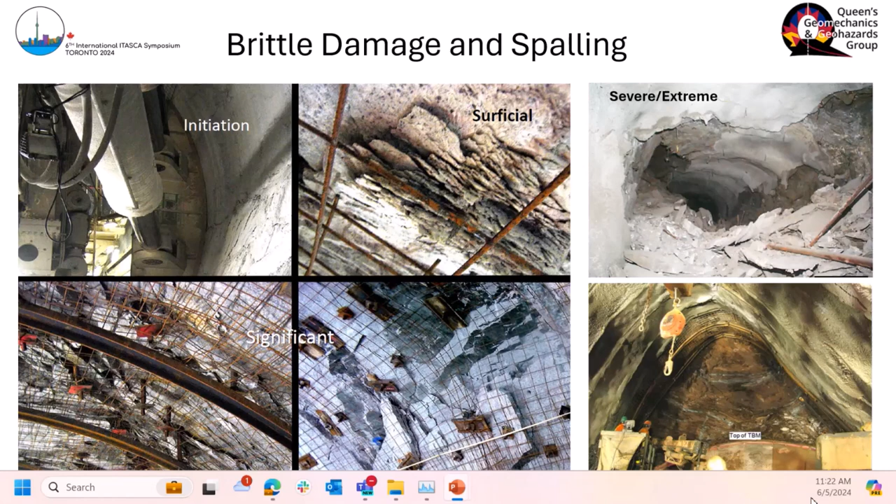But it fundamentally starts with some sort of a way of generating an extension crack in compression. The classical model for this, way back to Griffith, was the shear flaw, which could move in compression, generating singularities and creating a crack. And we make that big leap from that model to what we see as visible macroscopic excavation scale spalling. And how do we get there?

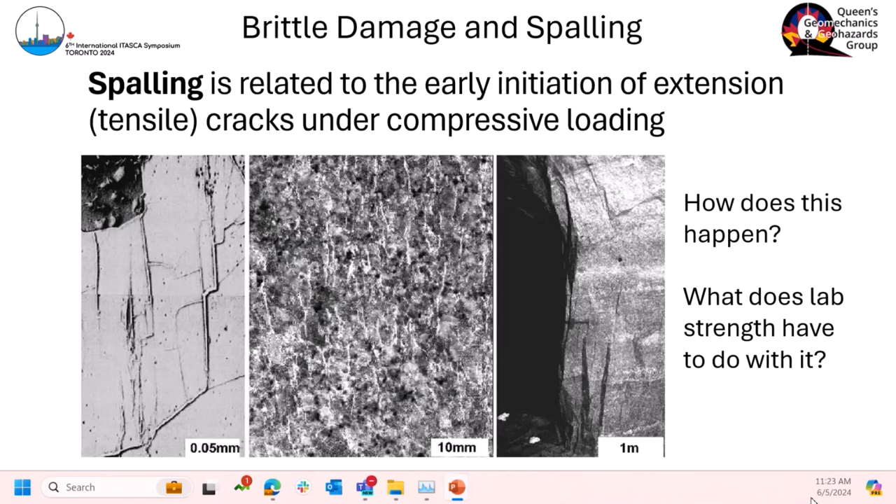Fast forward, we have all sorts of ways of creating what we might call brittle damage models, either with continuum models, simply playing around with the plasticity parameters to fake brittle fracture, or we can go to something more like UDEC, a discrete element model, to create brittle damage propagating through.

You can see that the key here is that the yellow in that model, the middle figure, is actually extension or tension, and only when you get farther out into the confined rock mass do you induce shear. Then we have complex models to look at interactions between structures, bedding, and brittle fractures in all sorts of different rock types. These all look great, and they all seem to simulate something.

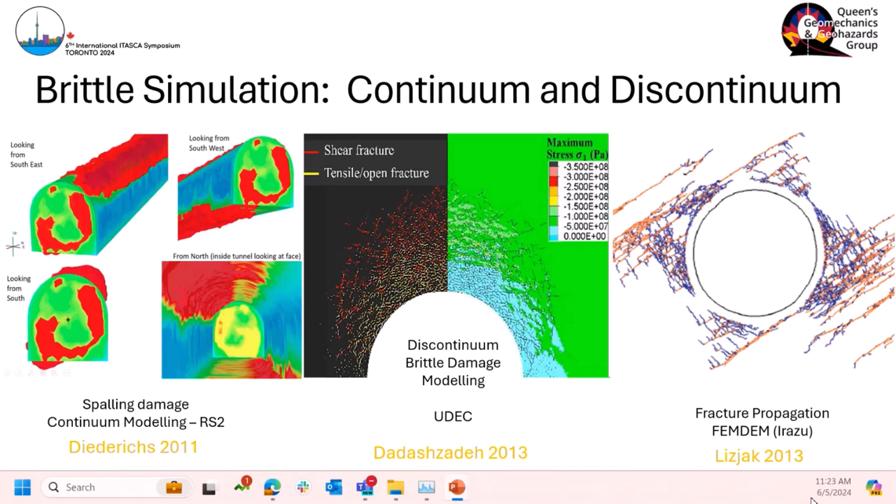But now we're into this wonderful... how do we get rid of that? Well, that's going to be a problem. How do we get rid of that thing on the bottom?

Oh, well, okay. So now we're into this world of colorful modeling, and the big question is: is it real?

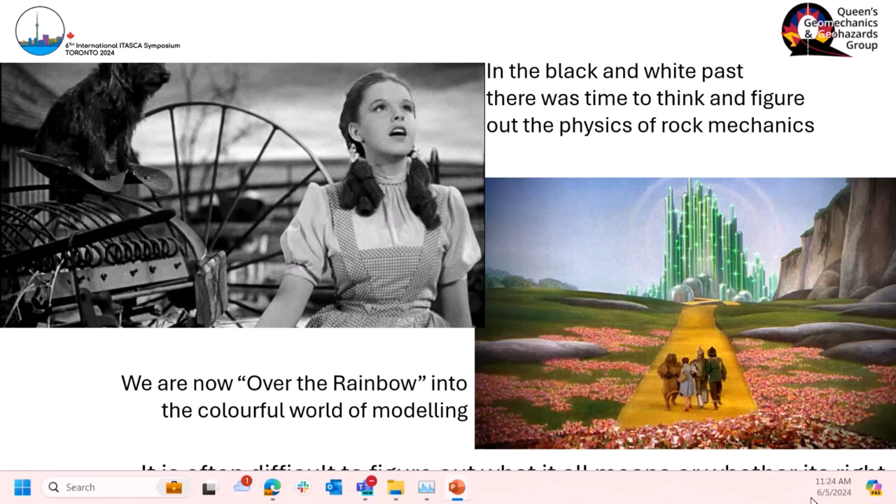So if we go right back to the beginning, Griffith was actually an aircraft engineer trying to figure out why windshields cracked on aircraft, and he came up with the idea of the inherent flaw, both in tension. It was extended into compression.

The idea is that this flaw in tension starts to pull apart. You get singularities at the ends, and they propagate. The longer the crack, the bigger the singularity, the more the crack grows. So this tension crack would extend. If you think about it in compression, you have to drive some sort of shear mechanism to create those singularities, but the physics is very similar.

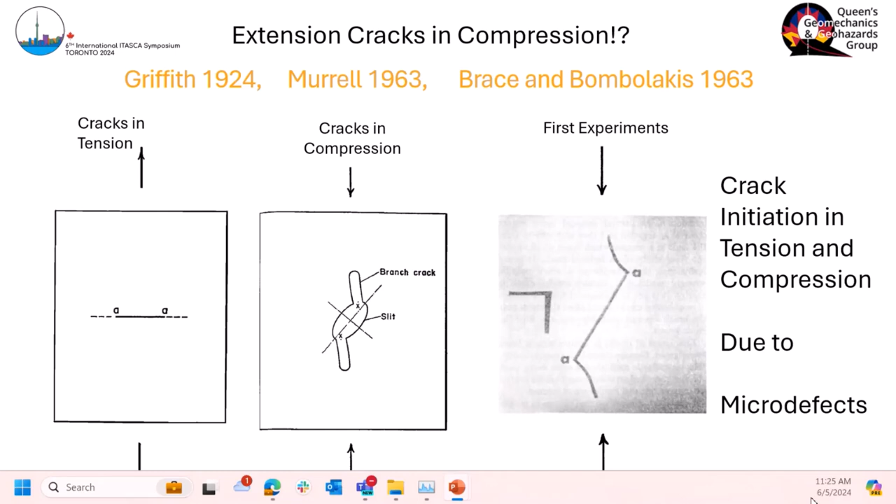So in tension, that's going to be very annoying. I don't know if there's any... oh, there we go. Okay, got it.

So in tension, I often used to say first crack wins. It's actually quite easy to figure out when damage begins and ends in a tensile situation, because of this idea that the longer the crack, the less stable it is. It's an unstable crack. As soon as you induce the first crack, the system will break.

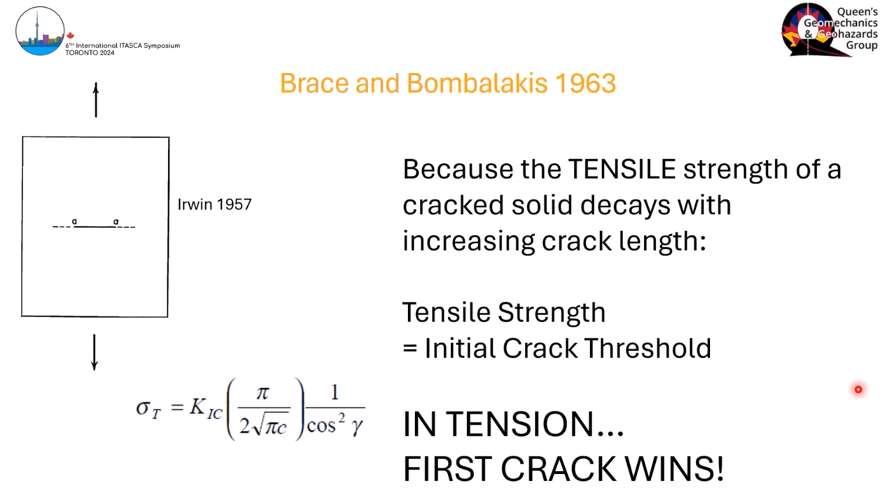Now, following on from that, this shear model was also good in compression to predict when things start. But if you do the math on any of these models, you find that the cracks stop very quickly as soon as they enter because the world is in compression, sigma 3. You have extension deformation, but the world is still under confinement, and as soon as these cracks go off on their own, they stop pretty quickly. So that's a problem.

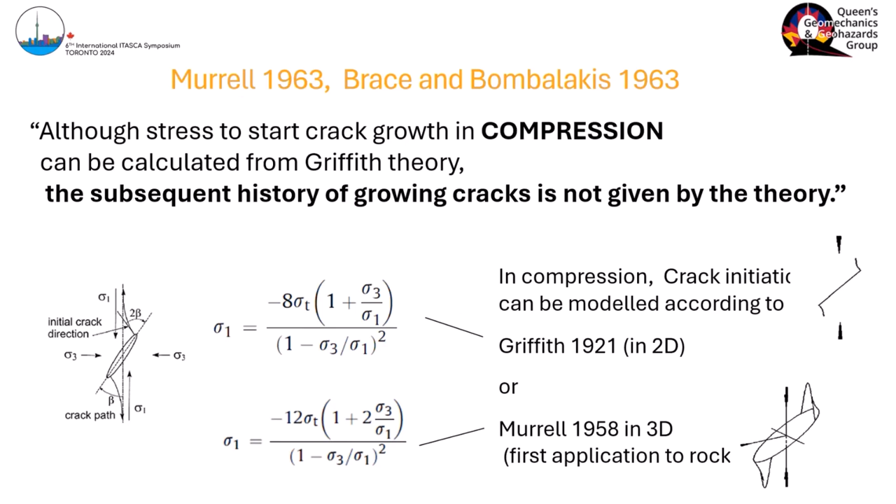What's wrong with this model? Things got even harder when we attached friction to these cracks. The original Griffith crack was open, but of course, cracks are closed.

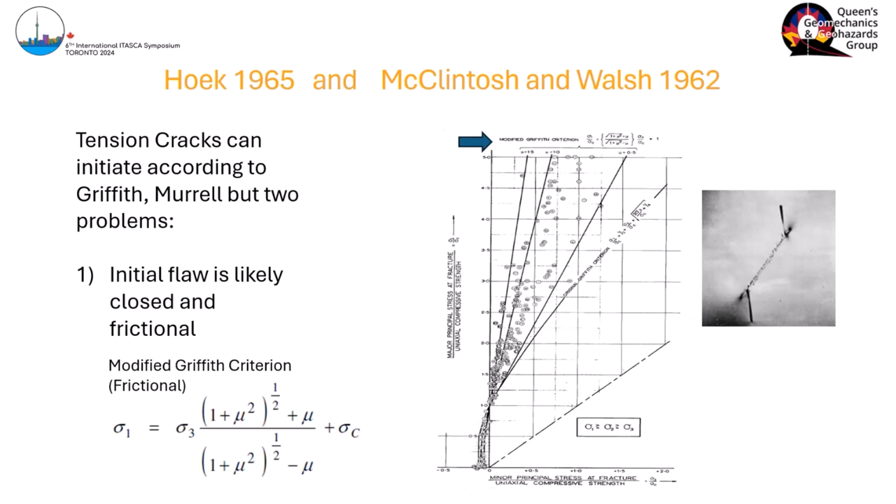So if you introduce friction, things get even harder to break and propagate. And it quickly becomes apparent that the only way you can propagate fractures through a confined medium is if these cracks interact. So this whole simple idea of fracture mechanics starts to get very complicated. The first crack is only the beginning in this case.

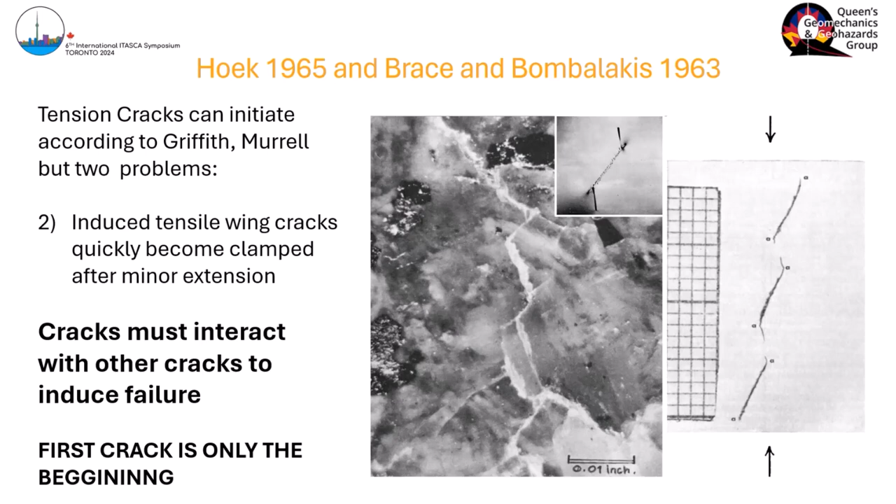But there was some hints of progress. Brace, Paulding, and Scholtz published some great data back in '66, which showed that the onset of lateral dilation in moderately slow loading happened at about half of the UCS, a little less than half the UCS. That's very familiar to most of us now. It had a slope in confining stress, axial stress space, sigma 3, sigma 1, whatever you like, which was non-zero.

But it's hard to imagine that this was actually frictional. Perhaps it is, but you can see that looks very much like if we do lab tests today of any kind, we get the same relationship for the first onset of dilation. But as we know, in the test it keeps going up to peak. Those cracks can't really fully damage the sample. We can record them through AE, and we can record them through strain measurements.

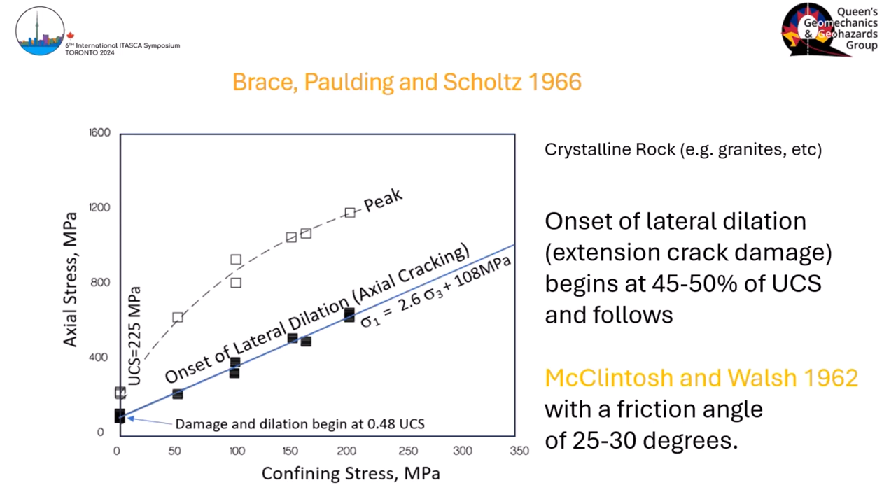Evert Hoek and others, I'm sure, did some experiments to show that in fact this idea of crack propagation, which is key to these cracks going anywhere once they start, is extremely sensitive to confining stress. So sensitive, in fact, most models don't really have enough detail and gradients in this regime to help us. But you get the idea.

As sigma 3 over sigma 1 drops, or sigma 1 over sigma 3 increases, down to, in this case, sigma 1 over sigma 3 around the 10 to 20 mark, only then do you get cracks propagating any distance beyond their initial dimensions. And that's really critical to how fractures work.

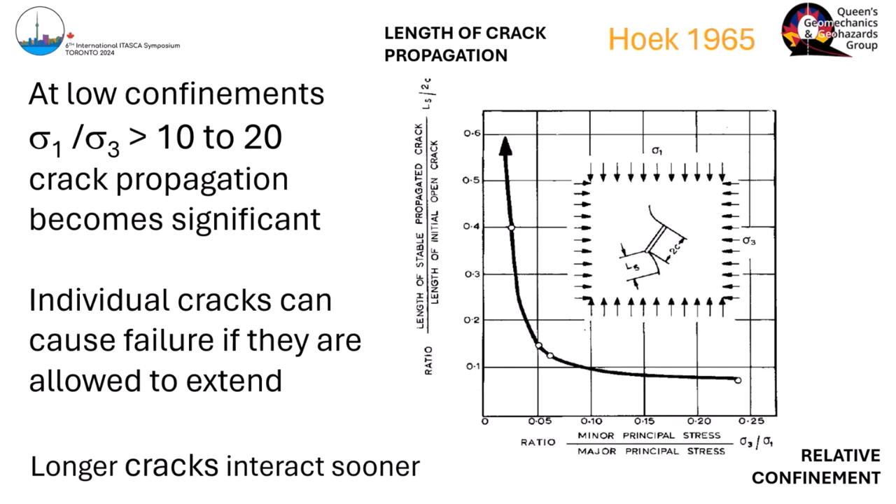This is not the same confinement dependency that was developed by Mogi through lots and lots of triaxial testing. Mogi's line is actually also important. It was an empirical line based on how tests behaved, but if you run it through with reasonable values of Poisson's ratio, you realize that this line marks something important.

Extension fractures can occur on the left side of that line and above it. There's no extension strain on the right side, just from elastic theory. And if you have no extension strain at all, everything's moving inwards, you can't create extension cracks, period, even small ones.

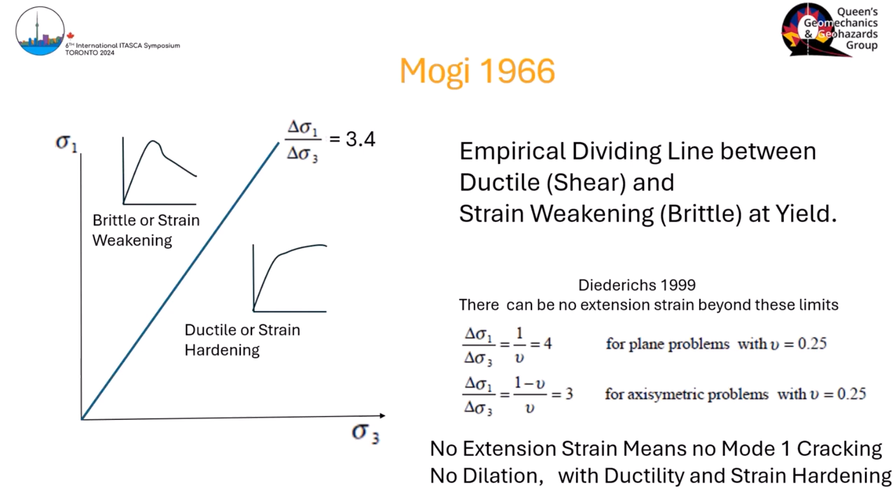And so this is the dividing line between truly ductile, or strain hardening, or shearing behavior, and brittle behavior. So you have these two thresholds, and you can see them here. The Mogi line, if you will, with sigma 1 over sigma 3 less than 5. And this Hoek line, when you start to drop below 10 to 20, in one case, above that 5 line, you have purely shear behavior.

This is the stuff that soil mechanics is based on. And without these three gentlemen I just mentioned, by the way, we'd be still pretending that rock is soil and just making the numbers bigger. But that's the soil behavior.

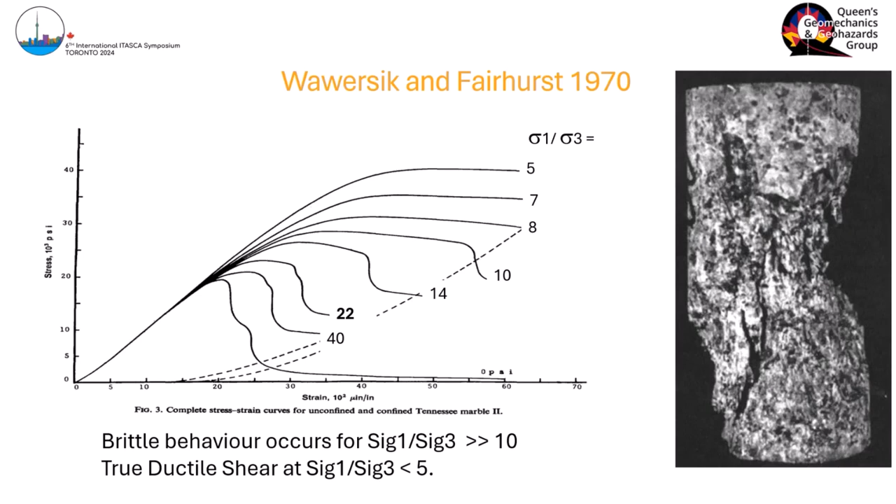In between, you have extension fractures coalescing to form shear cracks, and then below that, you actually have this brittle fracturing. And that lets us divide the world nicely up into true tension, spalling, tension cracks leading to what we'll call shear zones, and then pure shear past Mogi.

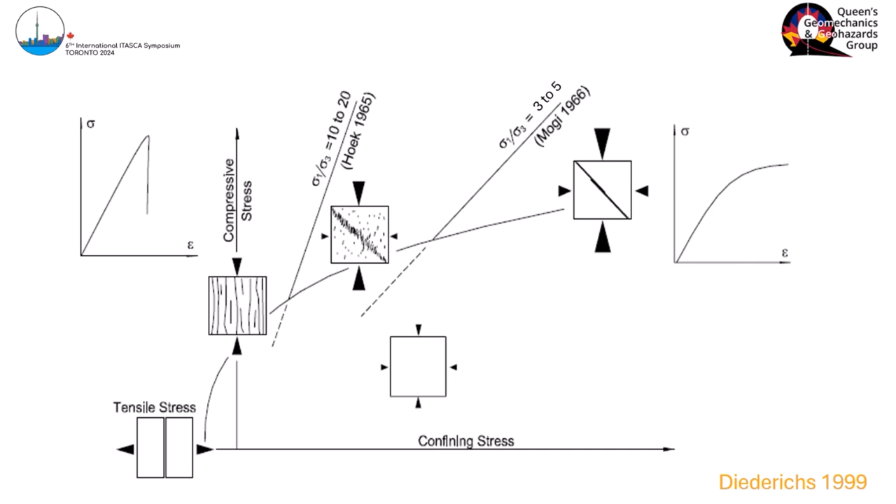So this is the beginning of understanding the world of fracture. And thanks to a lot of good work in the past...

Dr. Fairhurst doesn't seem to be here this morning. Had some nice drinks with him the other night. We talked about this.

You can see here in these wonderful graphics from this paper that the fractures begin on the external edges of this, in this case, the cylinder. The center is actually functioning in that shear mode throughout, and then eventually it just gets too much and you have final fracture. So this is one of the more significant figures in rock mechanics, in my opinion, this process that now we take for granted.

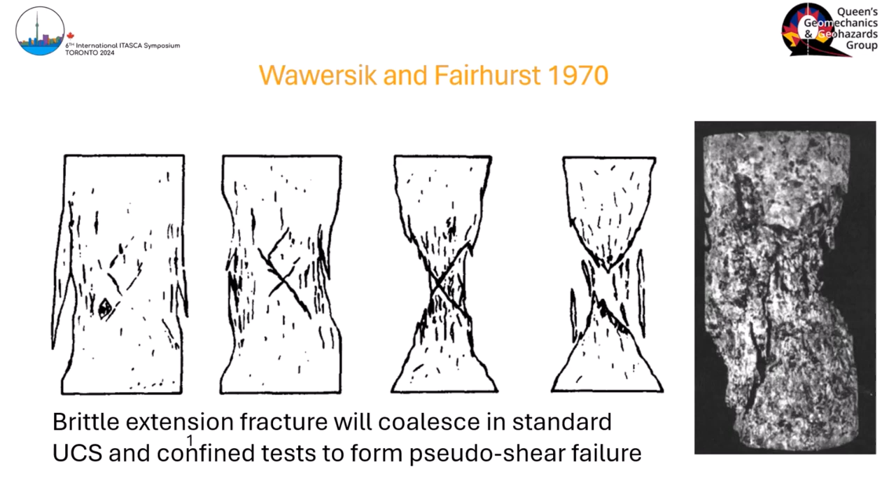This is a great paper that showed that this idea of shear cracking leading to tensile extension didn't need a shear crack. Anything that causes any modulus contrast, any sort of compliance issue, indentation within the sample, anything that can create disturbance in the force, as it were, can lead to extension cracks. So heterogeneity is key.

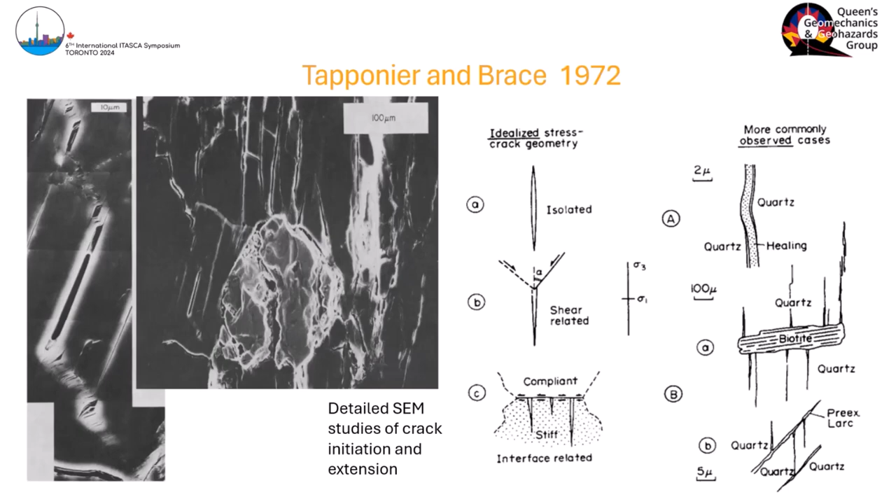In the same paper, they identified, I don't know if this is the first time, it's the first time I found, they identified this onset of dilatancy in a test, confined or unconfined. At some point, the linear behavior, the linear axial stress strain behavior starts to go nonlinear. And then, of course, you have failure in post peak.

They describe these as: so you have initiation from multiple sources, short isolated cracks. Those cracks cross grain boundaries, start to interact, and then finally it becomes so much that you have a macroscopic shear process. And so this, a long time ago, with physical reasoning, was the basis.

And what's going on here? Okay, I'm frozen. Yep, I am frozen. Wait. Maybe just... oh, what the heck? Hang on, let me just try this one. Oh, it's because I'm... nope, no idea. Hello, okay, here we go. Next, nope, didn't work, nope. Wait, can I just get out? Is that? There we go. Use arrows. Okay, thanks. Is that going to work? Yeah.

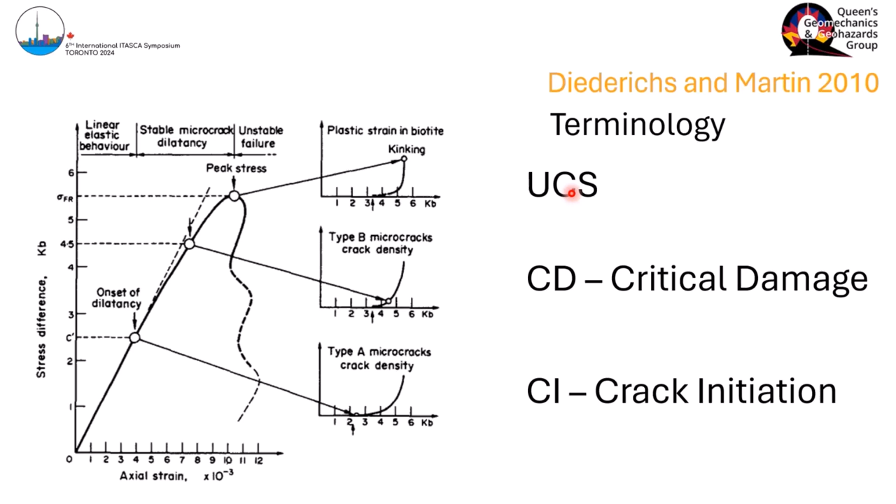So coming back to this idea of these thresholds, which are now sort of ubiquitous, and we test for them and have lots of discussion about them. It's basically the first point where you start to get extension cracks within a compressive field.

Those then extend. Once they extend beyond the grain boundaries in a crystalline rock, at least, for example, they start to control their own destiny and they start to interact with other cracks. And that's when things really get interesting. And in some cases, that's when your sample fails.

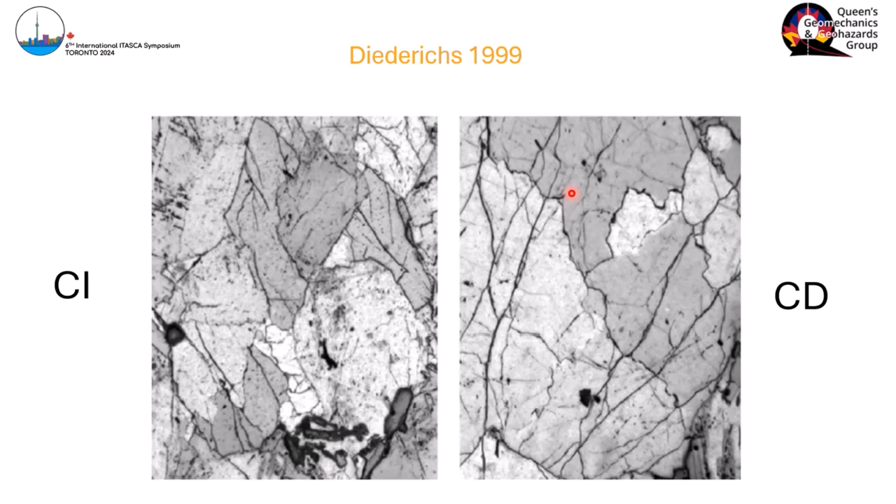That's usually the best you can do in situ in any sort of term beyond a few minutes. After that, anything that happens after CD is really a function of the testing or the constraints. And we can test for these things.

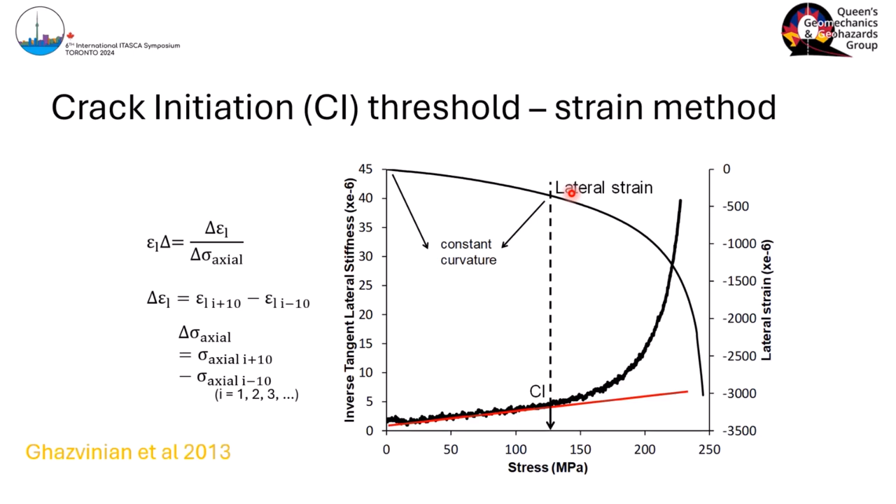I won't get into details here, but with all sorts of acoustic and strain sensors and extensometers and whatever, we can look for deviations in the lateral and axial strains to try to identify these thresholds, which are part of the strength model. Acoustic emissions have been very successful. So these are just ways we can get inputs into models, and we have some empirical basis for all of this. This is a work that just appears everywhere.

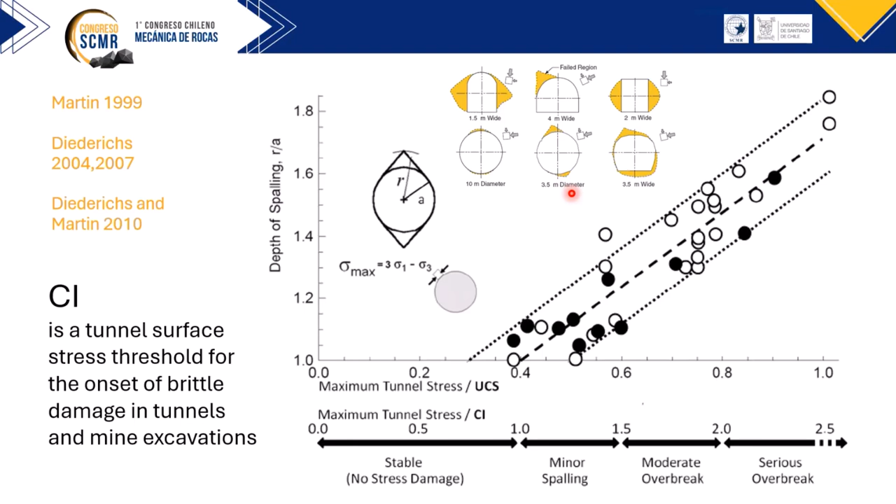So this is just evidence going to the point of, okay, something interesting is happening here that doesn't follow the normal rules of plastic modeling and so on. So modeling history helped this all happen, of course.

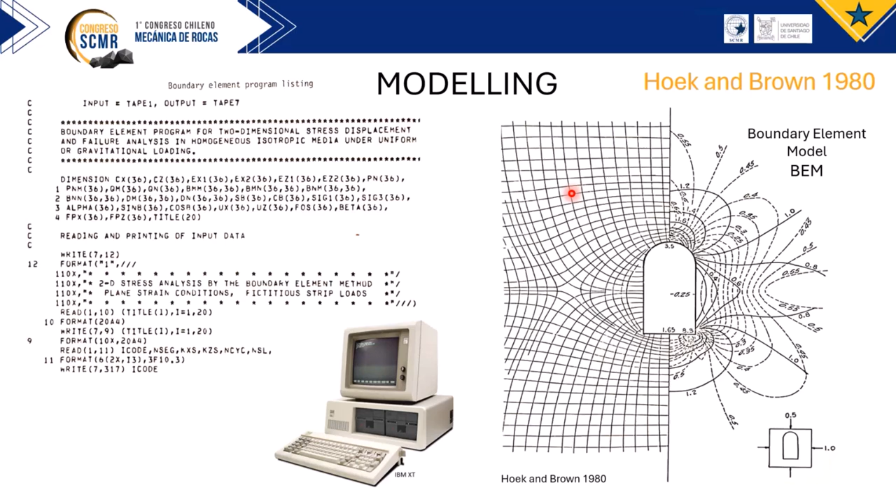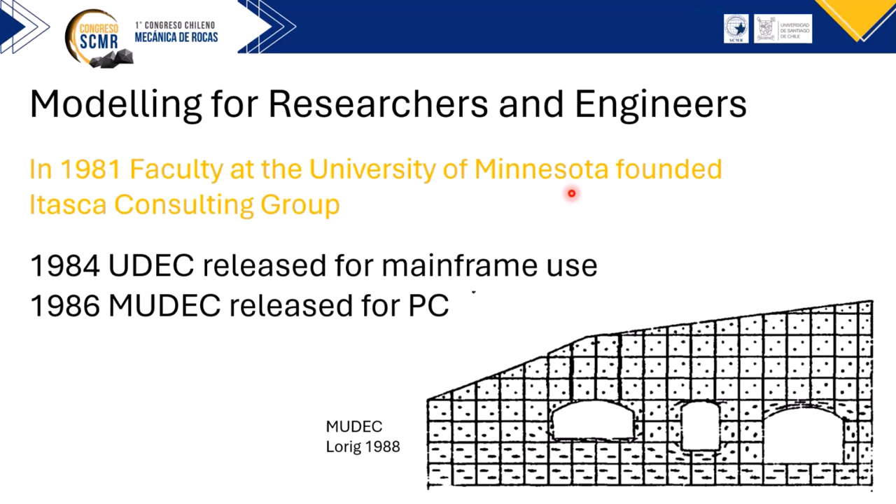Around the mid to late 80s, ITASCA started releasing commercial packages. I don't know if I've got these dates right. I remember the floppy disk of MUDEC showing up in the lab, which then became UDEC later. UDEC was around as a mainframe program. FLAC and 3DEC came a little bit later.

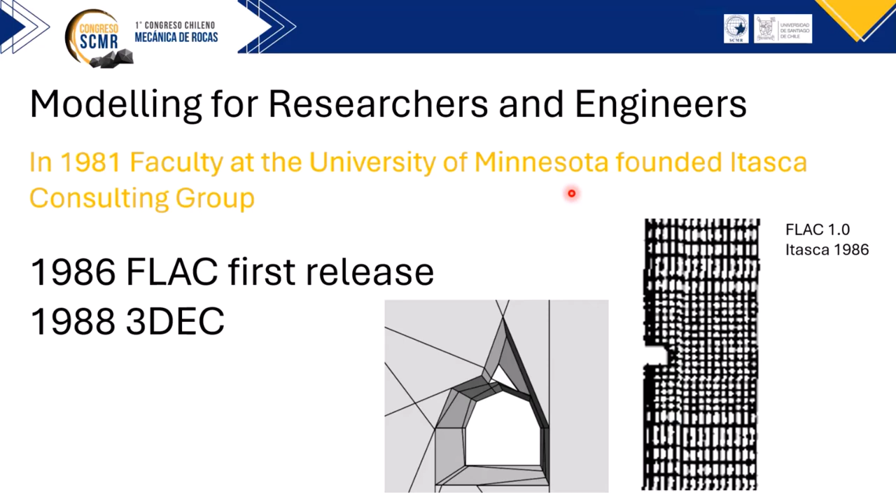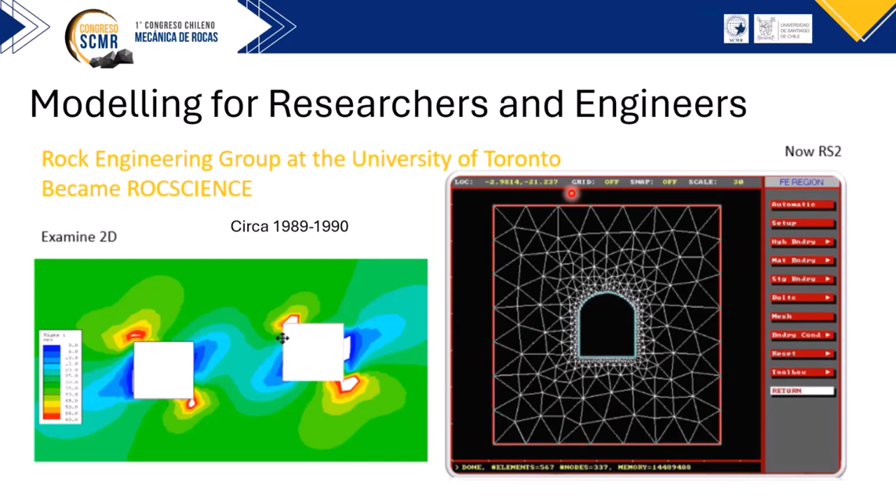This was the beginning of usable models for geomechanics and rock mechanics and even soil mechanics, really. Coupled with work at U of T, which was happening around the same time, bringing boundary elements and finite elements to a point where normal people could use them. And this was a big boon for graduate students, because you no longer have to, as a grad student, develop the program. You could just launch right into your research.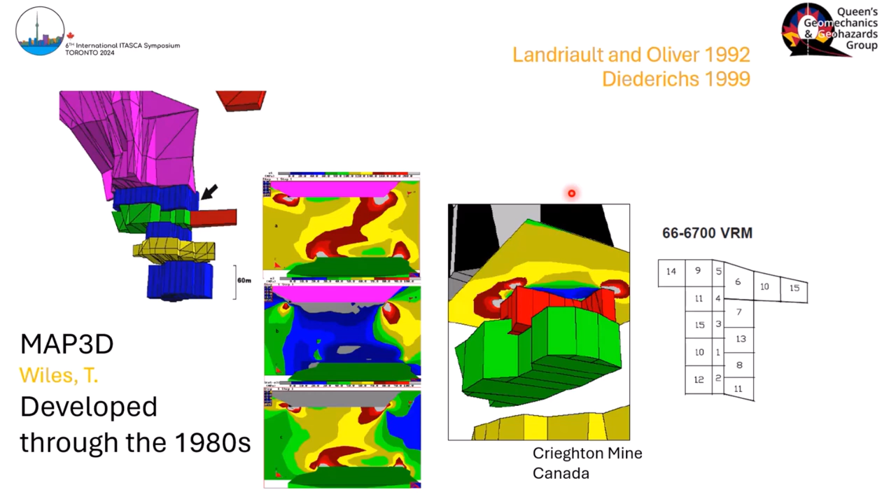When you analyze that, the black squares are yielded rock masses, and the white are apparently intact rock. What's kind of neat is if you overlay GSI models or intact models, even Griffith, it doesn't seem to work. But if you want to separate this data, you end up with a couple of choices. We originally started saying that sigma 1 minus sigma 3 equals a constant, half UCS. That's not quite right and causes problems. The reality is it's about 50% of UCS plus a slope of about 1.5 of sigma 3. And this seemed to be pretty neat.

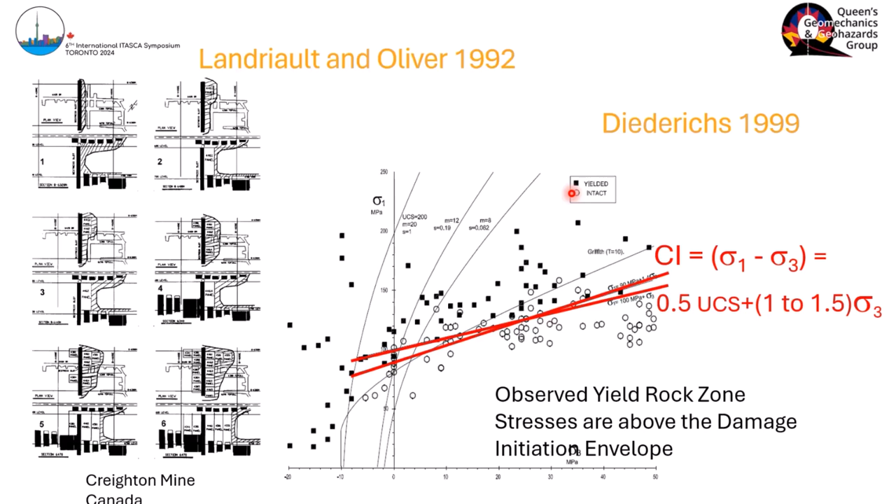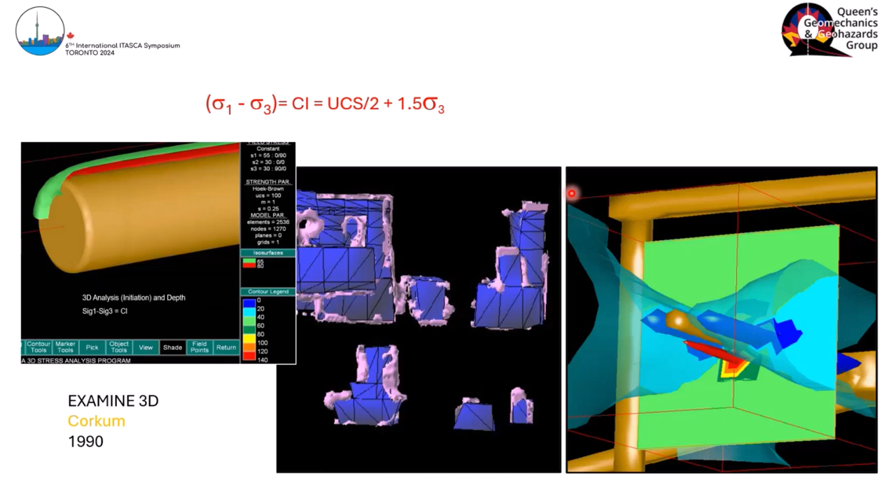What it allowed us to do in elastic modeling was exploit that 3D world to try to understand where we could expect this sort of brittle damage, from the URL to the Brunswick mine, to this tunnel in Europe. And we got pretty good at it. It wasn't telling us anything about mechanics, but it was telling us what we should expect and where we should expect this kind of behavior.

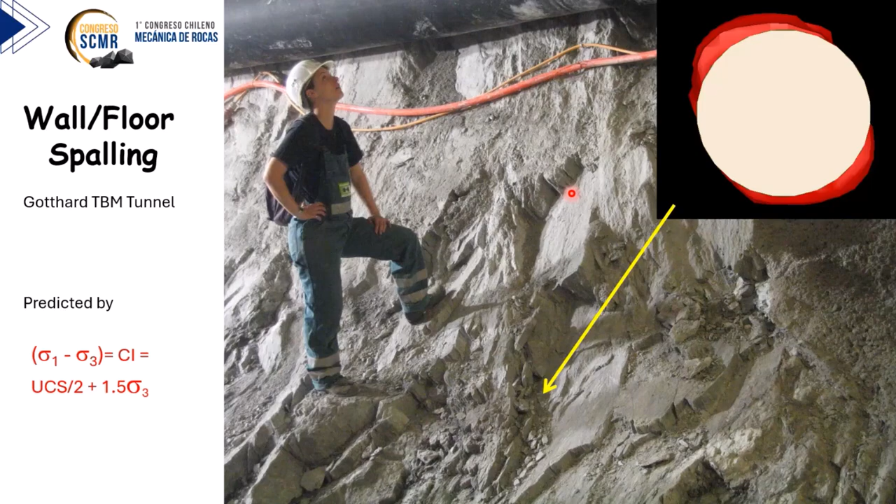This is the Gotthard TBM. That's Dr. Marlène Villeneuve, she's a professor at Leoben now in Austria. But again, simple model. Simple, simple. So what do we know?

Well, wall strength seems to be around 40 to 50% UCS. That corresponds to what we see in the lab as the onset of dilation. We know failure modes initiate through extension fractures. It seems to be a low friction process, and I say friction in the general sense of confinement dependent strength. It may or may not, we don't know if it's friction or something else. I have a lot of ideas, but that would take another talk. We know that rock under low confinement fails by spalling. If you increase the confinement, you eventually get to shear bands.

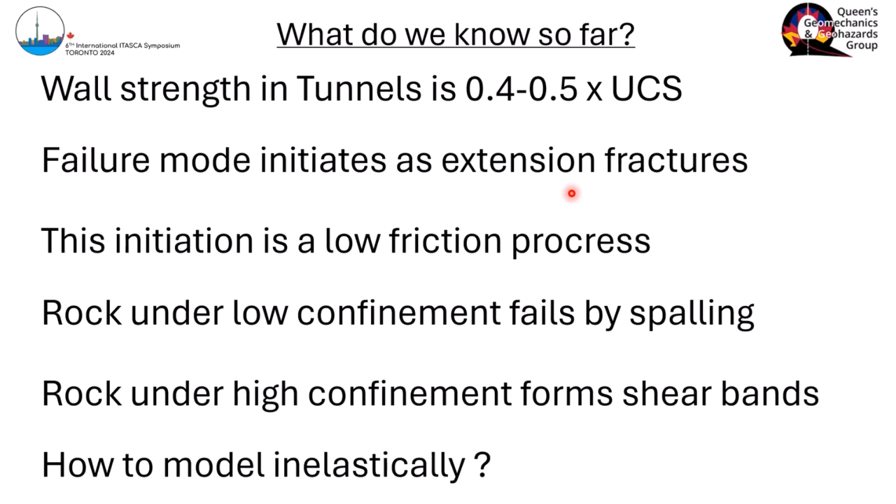Great, how do we model this inelastically with some sort of idea of what's really happening? At this point in the 90s, this was sort of empirical. And how do we tackle this? So you start to think about this idea of trying to create extension in compression, and you eventually get to this point.

All my friends are having kids at this point. You have those annoying child gates that expand into the stairwell, and I was always thinking about that. And then along comes PFC, and I'm like, aha.

You can see graphically what I'm talking about, this idea of inducing extension even in a compressive field. So extension strain within a compressive field is really how PFC models brittle fracture.

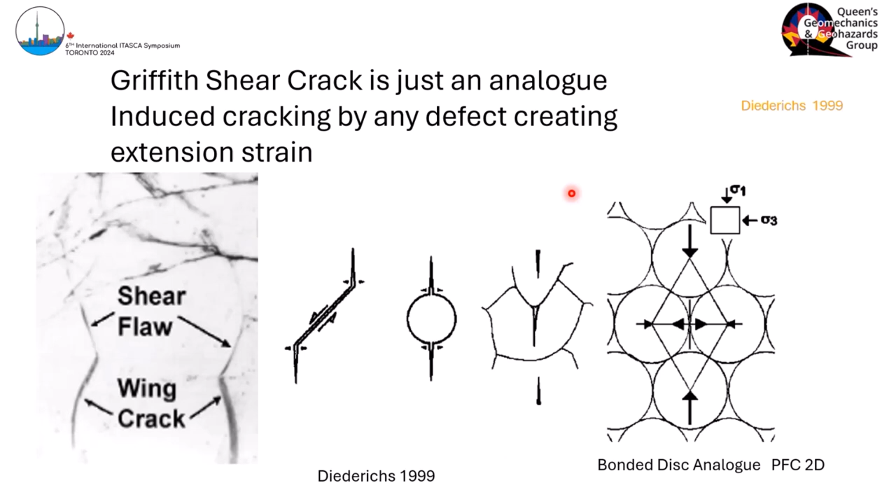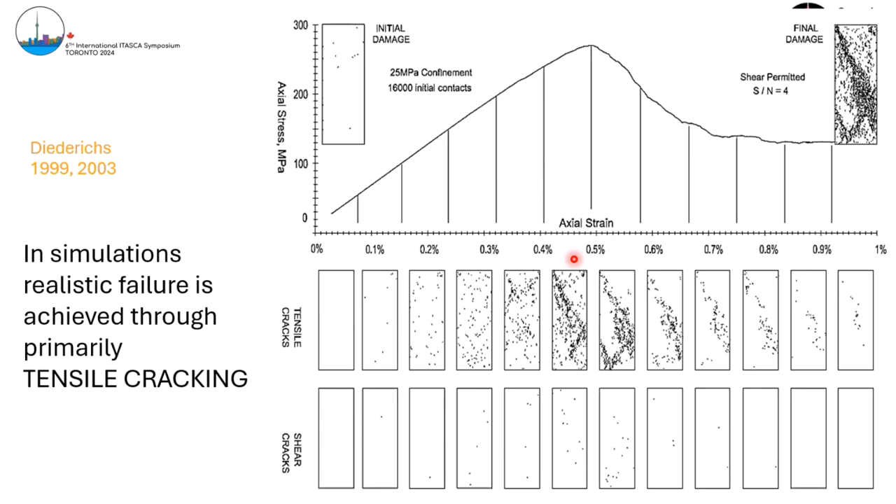I took that in the early days, and this is fairly simple - you'll see a lot of versions of this, but it was kind of eye-opening at the time. You could create totally realistic fractures, or totally realistic yielded samples which appear to be shearing at the end of the day, almost entirely from tension cracks. So these are axial, more or less pseudo-axial tension cracks within PFC, particles pulling apart, very few shear cracks except right at peak. This idea that most fractures could be entirely induced by the onset of these microfractures.

Even in compression, although as you start to increase the compression, shear starts to become more important. So this is damage evolution within a sample, starting to look great. Makes a lot of sense.

But what is yield in a rock? For the longest time, rock mechanics was the only discipline that didn't talk about yield. We always talked about UCS, which is essentially ultimate strength. No engineer designs for ultimate strength, but we never talked about yield.

So yield in a brittle rock - this was again PFC with a little bit of a FISH code at that time - detecting when two balls are talking to each other, or two discs, or two cracks. When are they within range of each other so that they're actually interacting?

So if we can get enough cracks, we can fail a sample through extension. But that's not always what we see in situ. We see a tunnel with a few very long persistent cracks going from top to bottom.

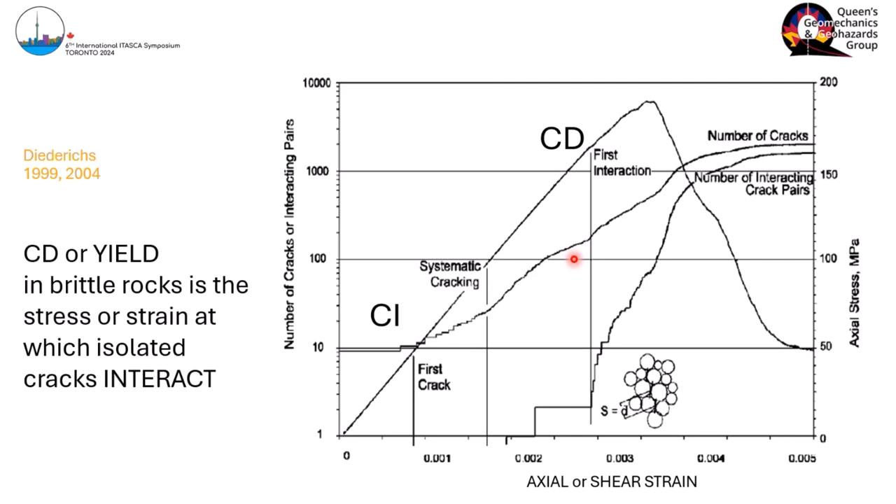How does that work? PFC did at this point - this was without the parallel bonds and everything - PFC wasn't great at this point in crack propagation. It was great at crack accumulation. So it was a kind of a test bed to study that phenomenon.

We had to invoke fracture mechanics to take it to the next step. Again, many people have looked at this idea that at extremely low confinements, cracks will propagate - not uncontrollably, but almost. And that tendency goes away as soon as you get very small amounts of confinement. And that's globally in a continuum.

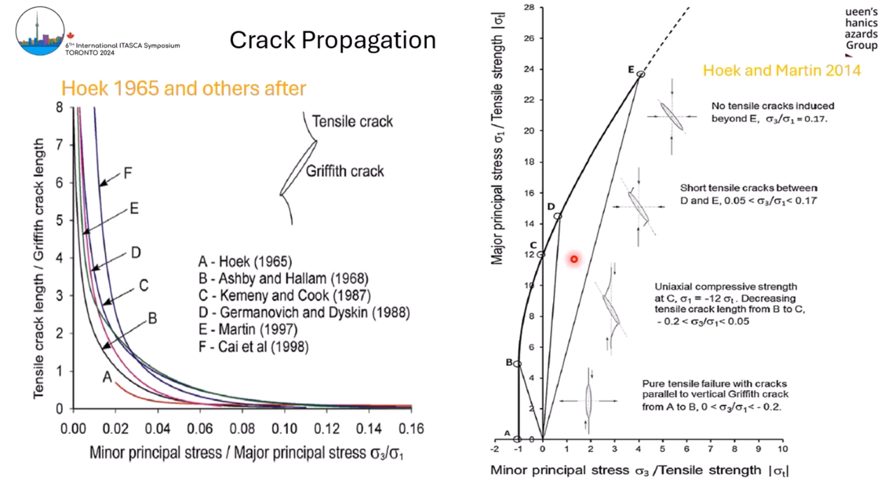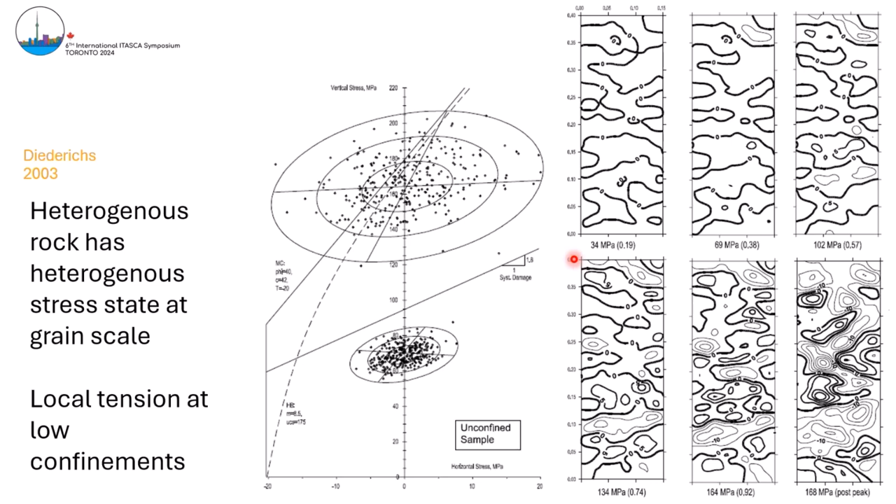Now you're starting to cook with gas, right? If you do a whole pile of runs, and you look at the top percentage - this is spatial extent of local tension - and this is almost increasing logarithmically. You can see that around 20 or so, sigma 1 over sigma 3 of 20, 25, we're up to 10, and then if you continue this, it basically envelops the sample.

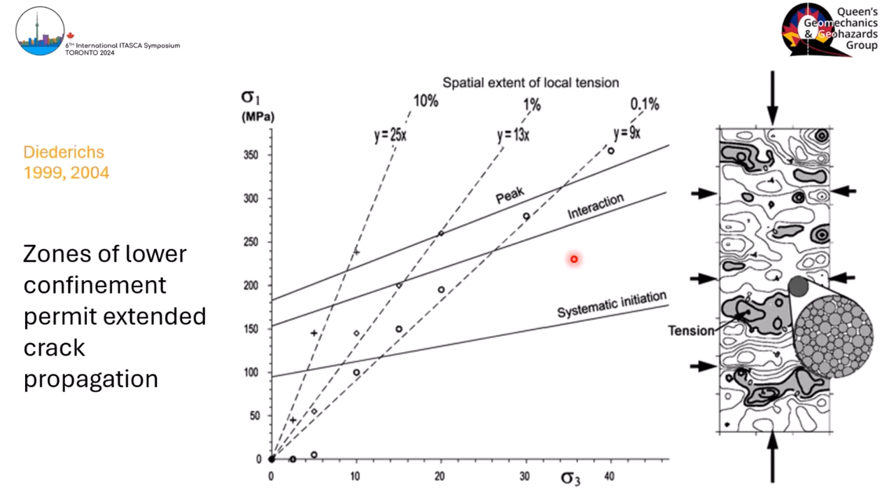Meaning, if you're here in this zone, you not only have accumulation of cracking, but you also have extension of the cracks, propagation of larger cracks happening, which then can have a much higher probability of interacting and/or just extending. And that all summed up led to this figure here.

This is where we divided the world into tension, spalling, and everything else. This is the so-called S-shaped curve, which is now used fairly ubiquitously in rock mechanics - not necessarily as an S-shaped curve, because that's really hard. But we needed to go from here then to find a way of putting this into a model.

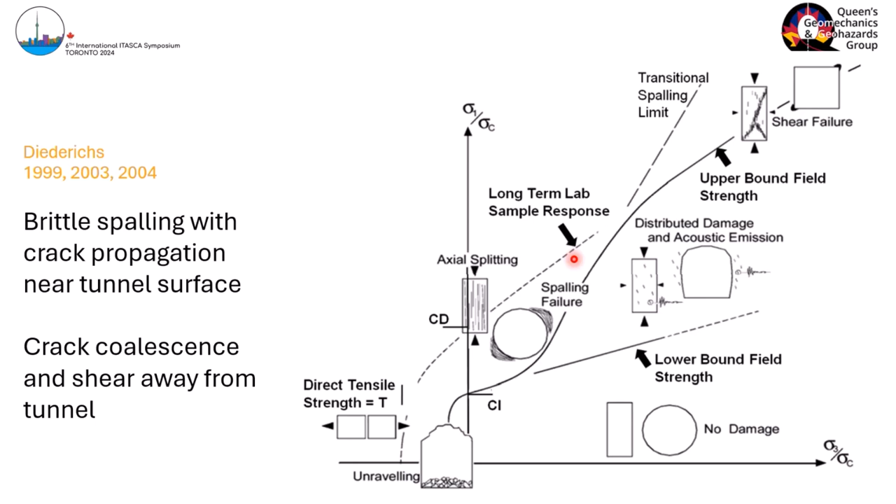The first attempt for me was to fake it in RS2 finite elements. I had to get Brent Corkum to change the dialog box to let me put a higher friction angle for residual than peak, because they locked you out. This idea that you have a high cohesive, low friction peak - that's the fracture mechanics. And then when that yields, the cohesion is lost, but the confinement dependency increases dramatically.

And this was a neat way of both getting the ductile-brittle behavior, as you can see, simply through the transition. Now, the only flaw here is that the hardening rule is not great, so this all sort of happens very quickly in the model, and there are some numerical issues that happen occasionally.

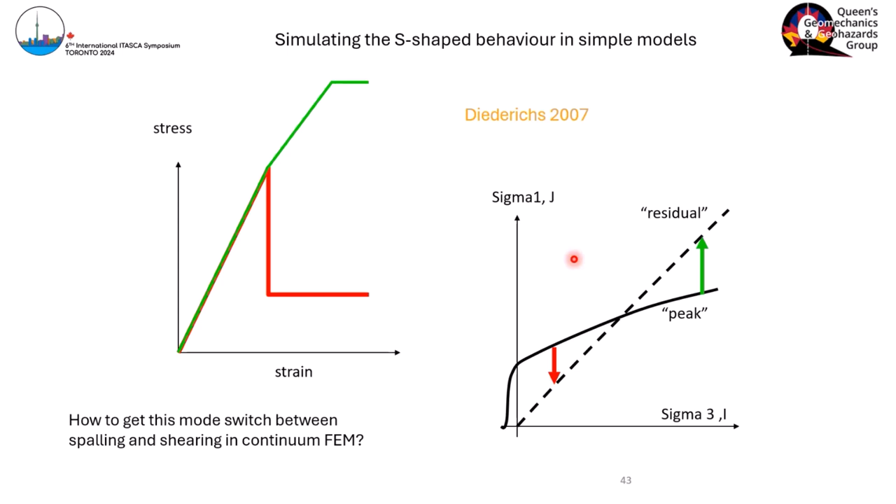Around about the same time, some people, including Hadjiabdomajid, who was my office mate, we were working on these things in parallel. He was working with the CWFS model. It wasn't called that at that time, but it was the ability to put friction, cohesion, tension, and even dilation if you want, into a table so that it evolved with plastic strain. Fabulous. These two models are essentially just different ways of doing the same thing.

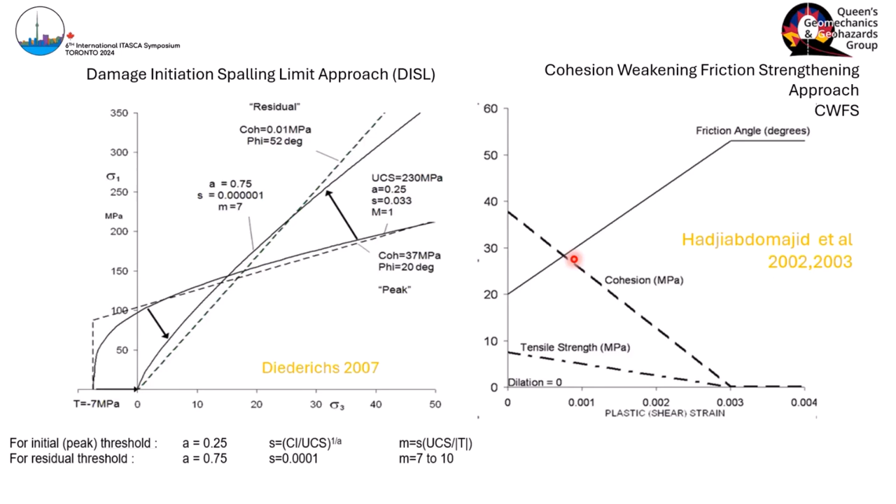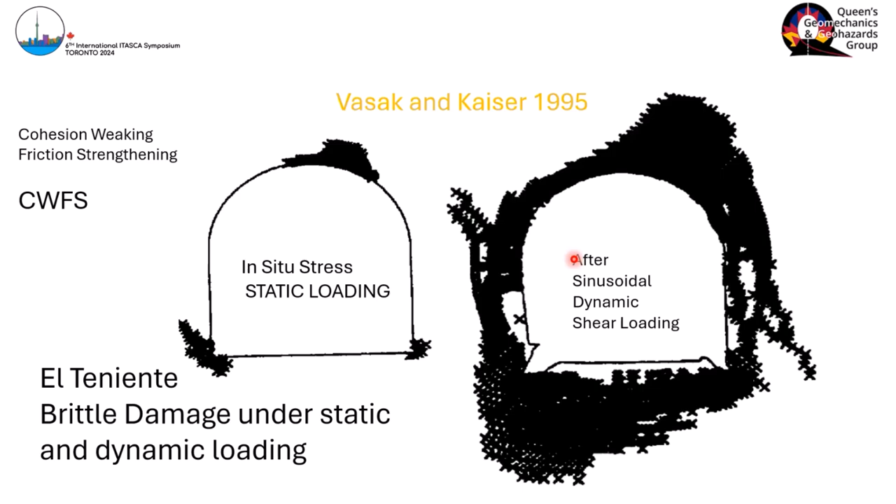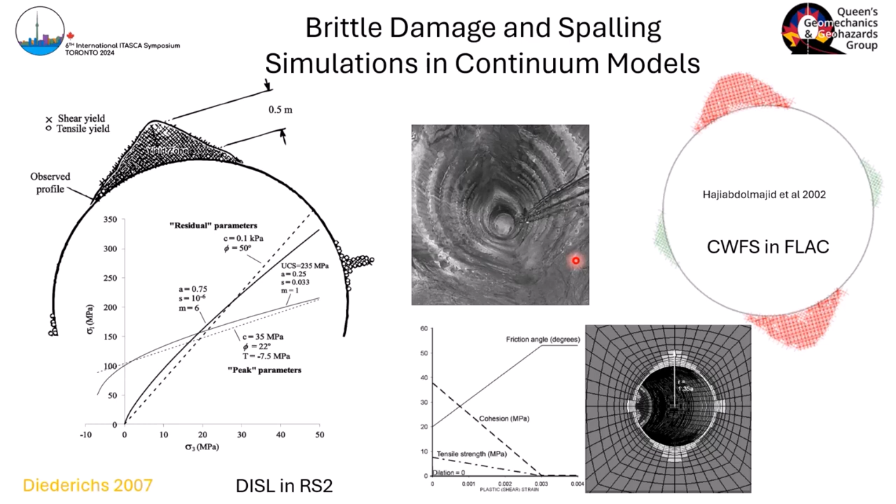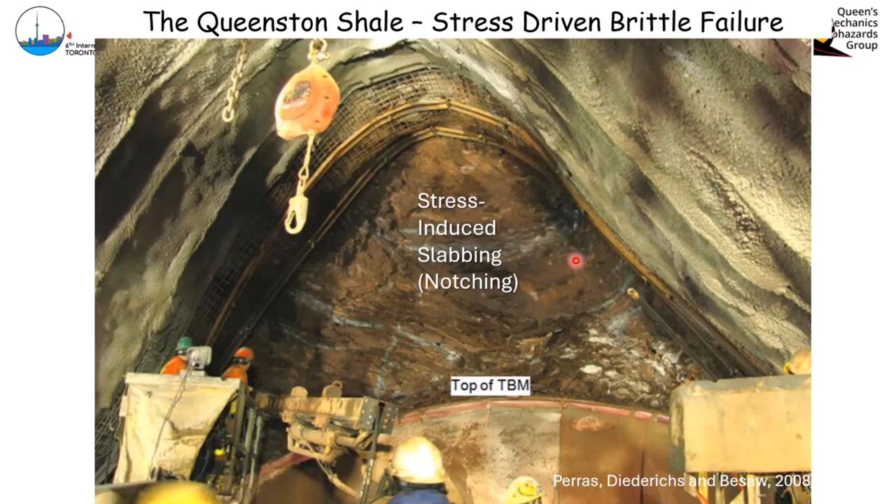We could simulate the URL with either the DISL model in RS2 or the CWFS model in FLAC. We could even do a pretty good job when things got really hairy, like this Niagara Tunnel - again, a bedded material, but the beds are not really discrete. Once the fracturing starts, the beds interact and really drive the spalling. Both models were very successful in predicting the actual extent of that.

And I've used this, and many people have used this now with RS2 in this case, to do real simulations and real analysis of what's happening in tunnels, to predict behavior and even for design.

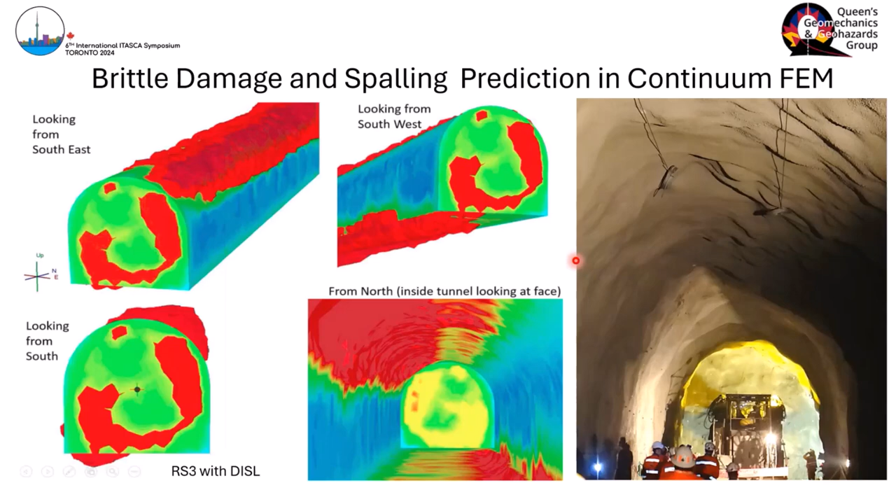The caveat here is that now when you get into support design, you can model this brittle behavior. And if you use GSI, this looks very different, just for your interest. GSI is based on shearing, this is based on spalling - I won't show the other - but you can see the support trying to intercept that spalling deformation and deal with the deformations coming from the inelastic process.

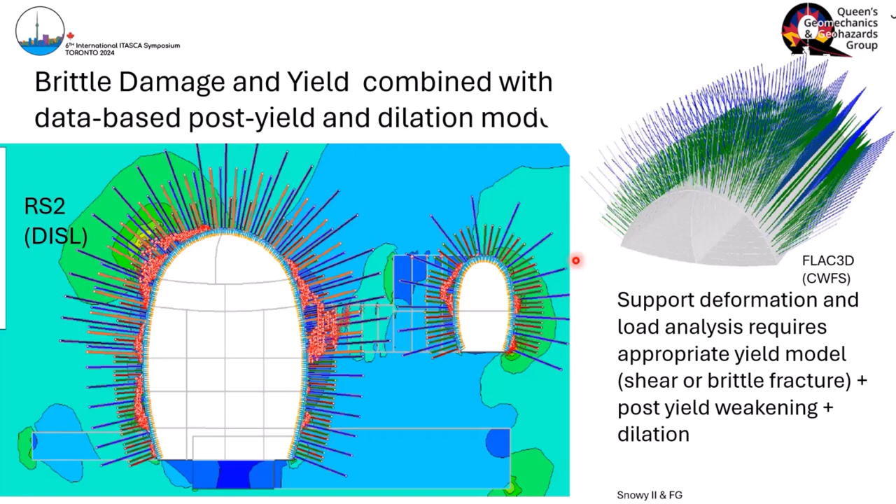Now, here's the rub: without some sort of useful dilation law, this gets really hard to make sense of, or actually be real. And it comes back to that question - we're simulating something that looks real, but it's not entirely real. So we have to think about dilation.

What happens after yield? Gabe Walton's work was very much on the brittle side here, looking at how dilation evolves with strain, and it's not always what you think. It does increase very rapidly at first and then starts to decay.

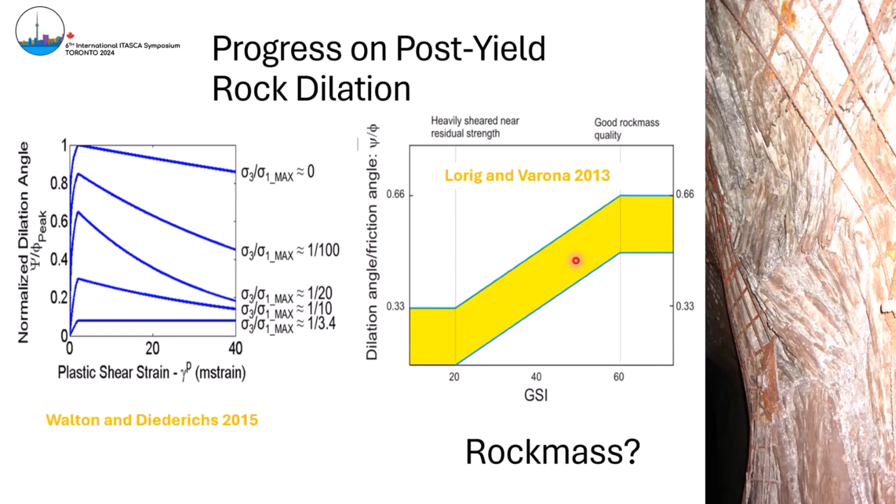Some very useful work from Loren Lorig and Varona, just trying to understand what do we do about a rock mass - so somewhere in between here is brittle rock dilation. Fedalberto in the front there is working with me on that, trying to sort that out.

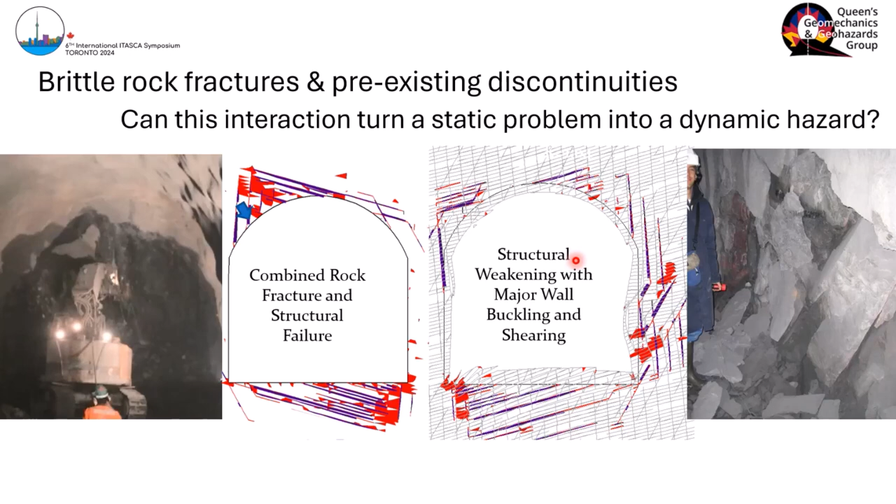So you can use these simple continuum models with pseudo-continuum structure, joint elements, to look at that interaction and come up with some very interesting conclusions. It was the only way to explain this idea of brittle spalling interacting with, in this case, volcanic bedding, and the genesis of these rock bursts. These were at 300 meters. Rock bursts have no business being at 300 meters, except for that interaction.

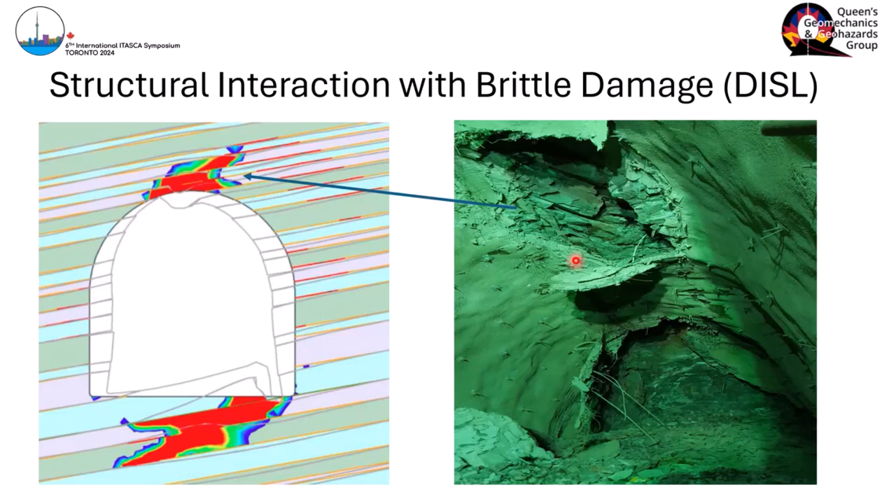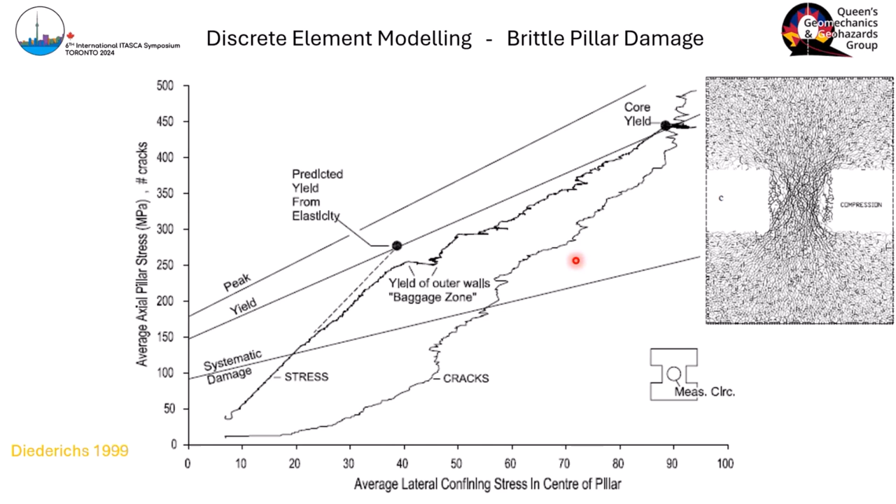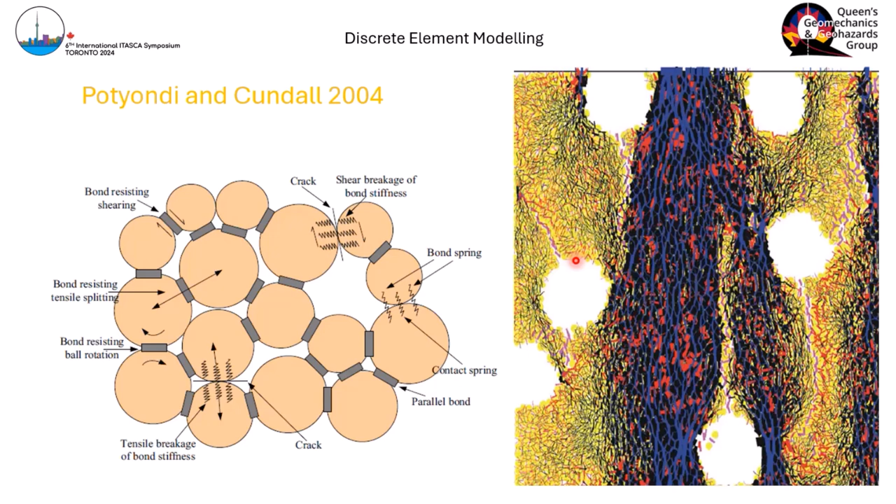And then, of course, PFC grew a lot after this paper with the contact models, the famous lithophysal analysis - that was one of my favorite words for a while. Showing more and more elements, we could get smaller and smaller cracks forming and do more and more realistic simulations.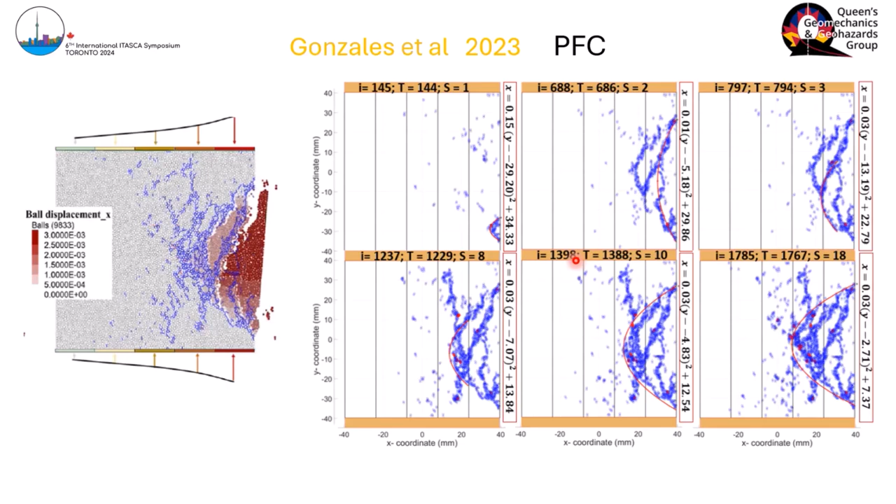This is some work from Fedalberto in the front there, coming back to this pillar idea and looking at how the nature of the yield changes as we fail. I'll let him - you can ask him some questions, he gave a little presentation. I'll have to skip that slide in the interest of time.

UDEC, same thing. We get these pretty models. We can look at stress flow. We can create block models. This again is UDEC. We can let those blocks fracture.

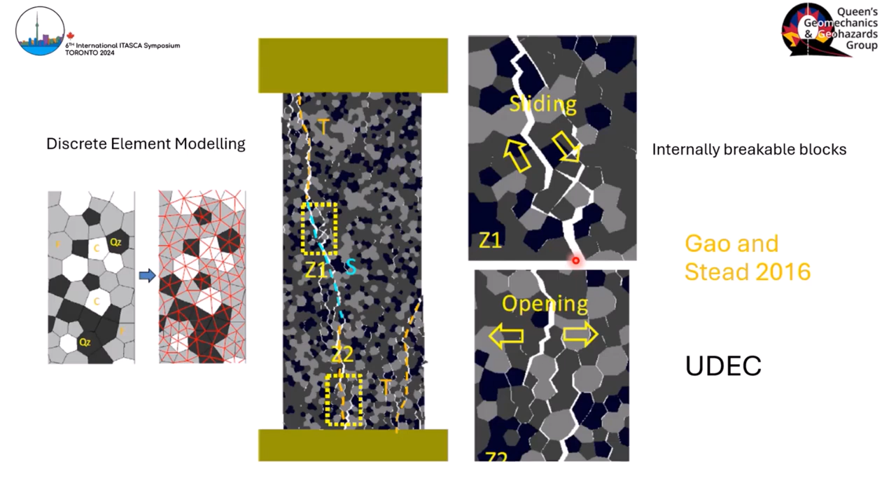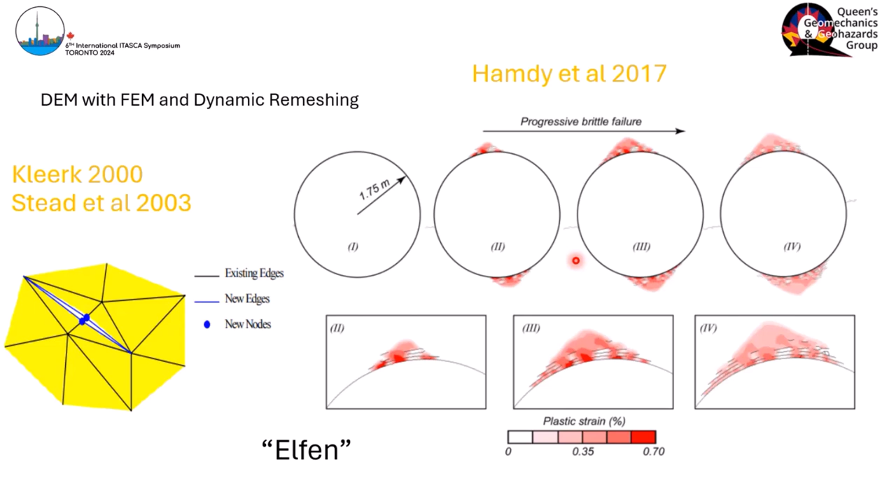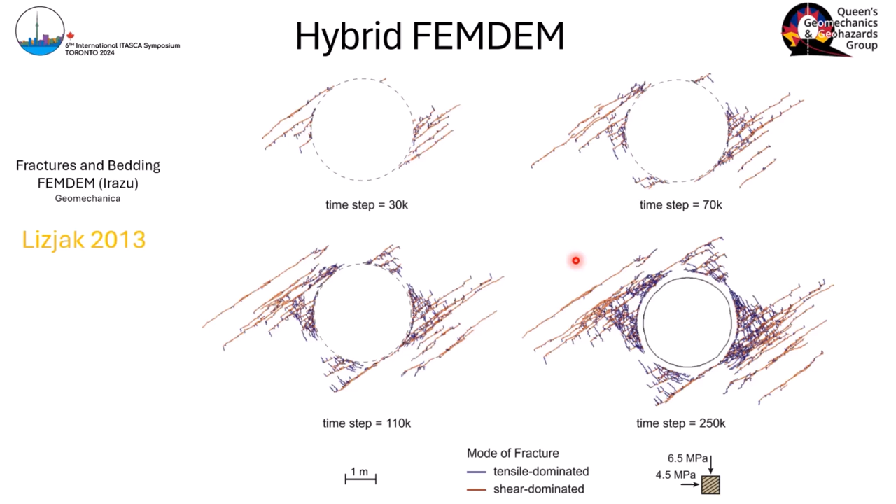This was some work out of this program called Elfen, where we had this bonded block model, but the blocks could actually remesh and fracture themselves. This was a very advanced program, hugely computationally intensive, so it doesn't get a lot of use in rock mechanics, but you see the idea. The folks over at Geomechanica just made their triangles a lot smaller and got similar results - really interesting work, looks great.

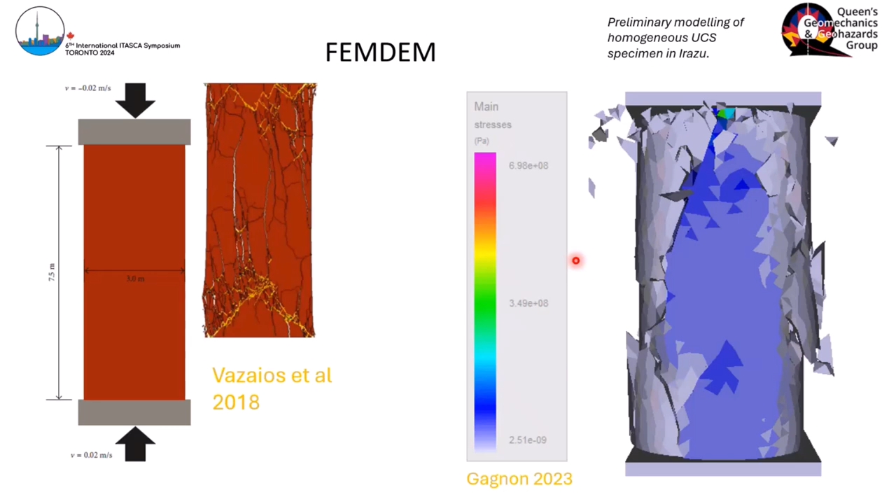And you can do the same thing with this type of model at the sample scale. At the rock mass scale, you can look at the interactions between brittle fracture and - you can't see them here, but over on the right where it starts to get more intense - you can see existing structure.

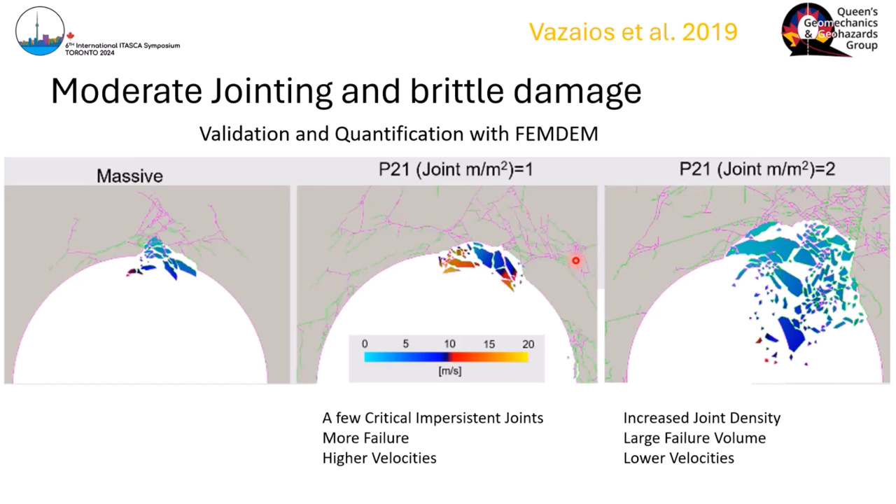Almost there. And of course, we've used the 3DEC. This is some early work in our camp, looking at brittle spalling with bonded block models within 3DEC and 3D to capture this, both the hourglassing of the pillar, but also the internal confinement generation that happens inside. This is one example of a pillar that did this, and I've never seen any others. This is at Elliott Lake Mine in some sandstones.

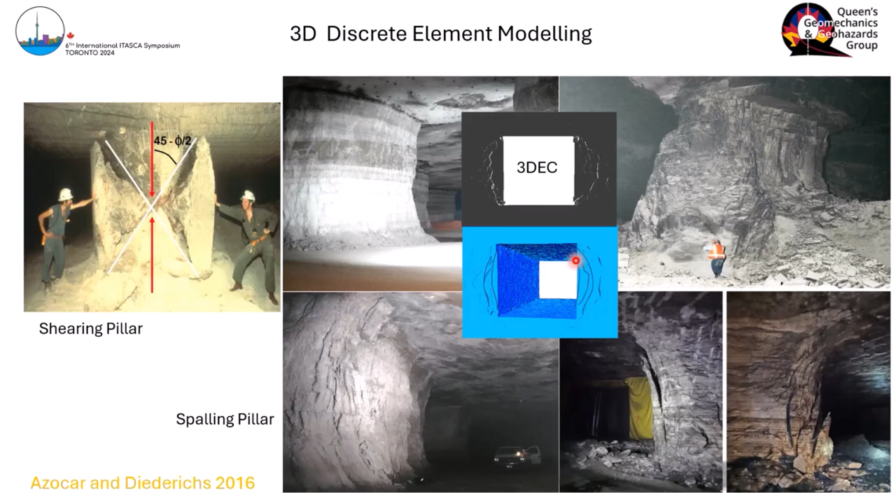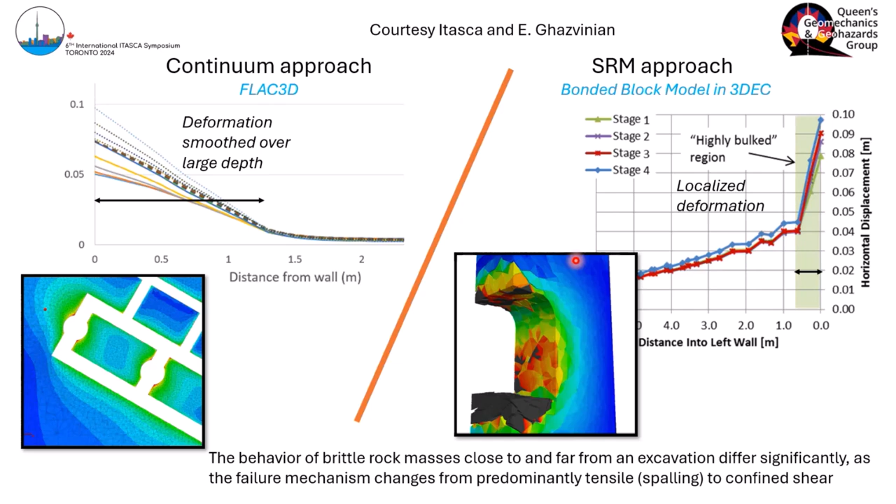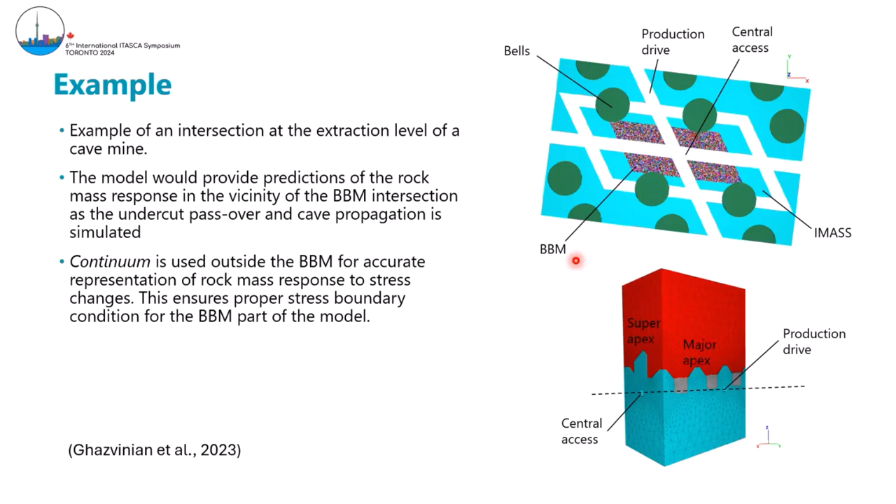And then I'm just going to, I think where we're at today probably is this, which is courtesy of Ehsan Ghazvinian from ITASCA. They're integrating these bonded block models into a larger model surrounded by a continuum, and then the continuum takes care of the evolving boundary conditions, and the bonded block model looks at internal fracturing and allows for fracture generation, dilation, everything else. You can see the rough outlines just by squiggles of the bonded block model and the supported drift intersection there. Then the outer is just responding to that.

And then finally, we can do some support design. So we get the propagation, we get the depth, and we get the bulking or the dilation. Now the question is: is it right? Well, then we have to monitor and try to figure out if this great answer is the right answer.

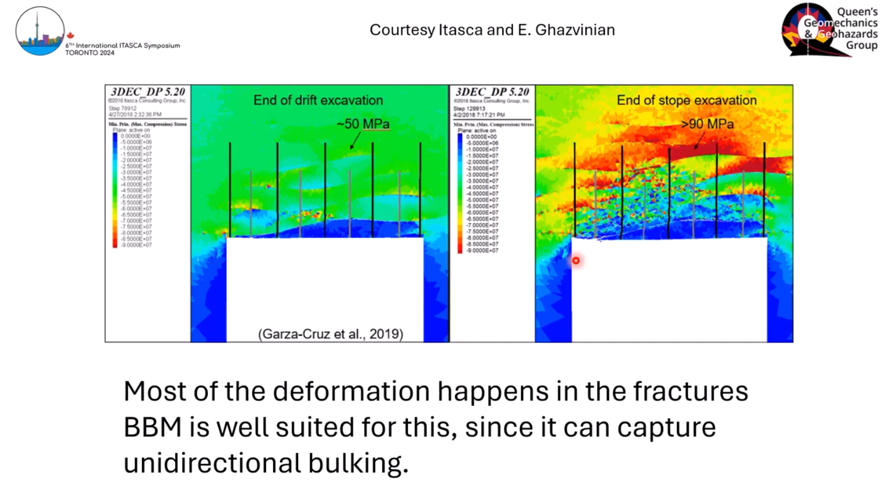So I'll just leave it for anybody who's still doing research - there's so much we still need to know. I would say we're still not capturing the true fracture extension and interaction processes here, but maybe what we're doing is good enough for now. But there's lots more to do, and this will be on somewhere.

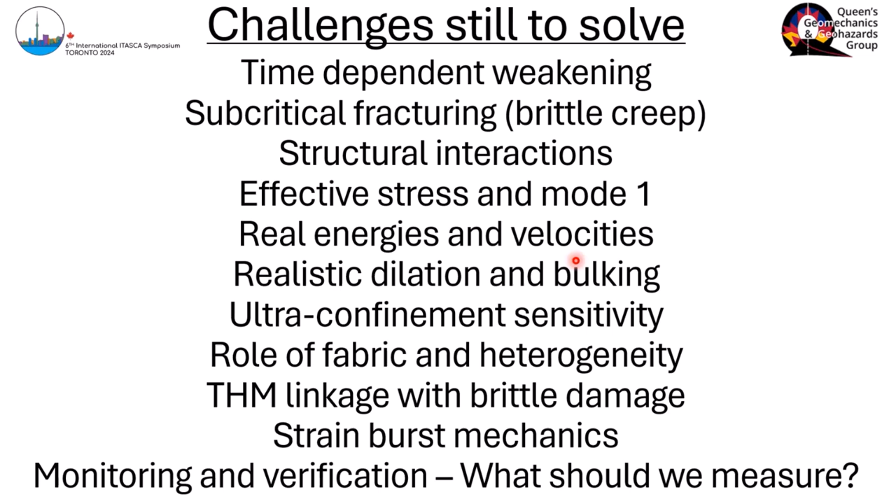So just to finish up: the Colorful World of Oz is super cool. Looks real, feels real, you wish it was real, but just don't forget to visit Kansas every now and then and get back to some basics and figure out if it means anything.